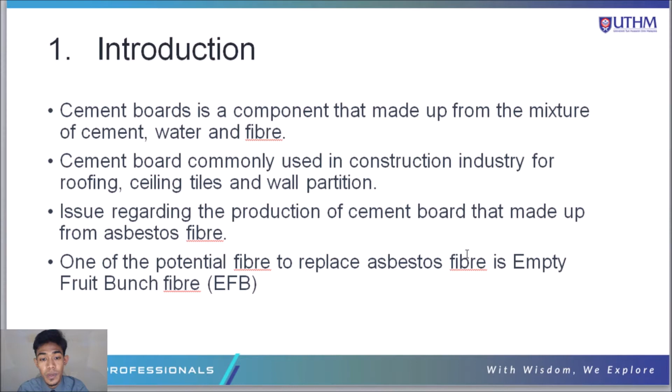This study was undertaken to achieve the following objectives. First, to identify the effect of the vibrocompaction method of EFBCB on stability of thickness and density of the sample. Second, to determine the effect of combination of hot water treatment and vibrocompaction method for EFB in terms of physical and mechanical properties.

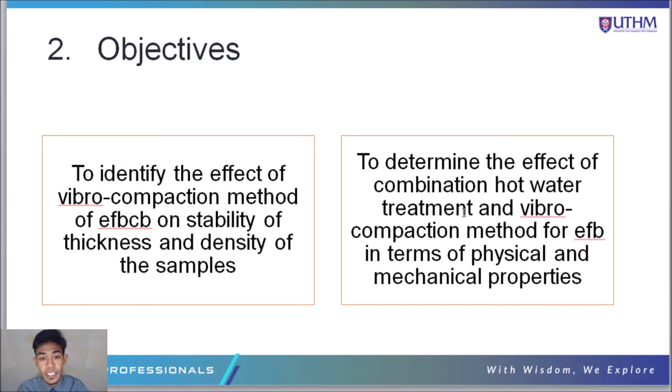There are several issues regarding the production of cement board by conventional method. First, the uneven distribution of cement and fiber within the cement board component affects the density of the cement board. This will affect the final result of mechanical and physical properties of cement board. Therefore, the use of the vibrocompaction method was introduced to evenly distribute the material.

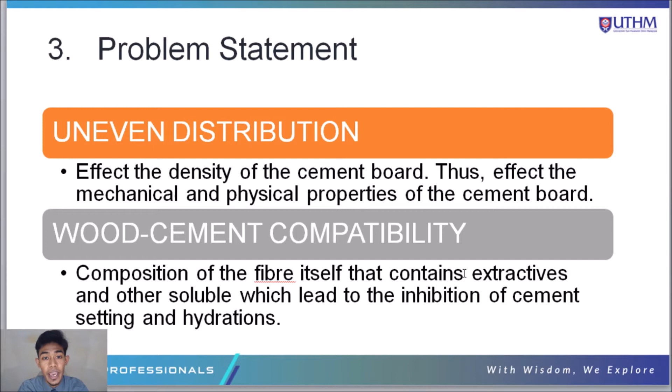Next, the wood cement compatibility. The wood cement compatibility is related to the composition of the fiber itself, which contains extractives and other solubles that lead to the inhibition of cement setting and hydration. Thus, hot water treatment of fiber was introduced to remove the extractives and enhance the wood cement compatibility.

Here is the scope of study. First, use of empty fruit bunch EFB as reinforcement for cement boards. Second, hot water treatment for EFB fiber based on 50 degrees Celsius, 70 degrees Celsius, and 90 degrees Celsius.

Third, modulus of elasticity, modulus of rupture, internal bonding, thickness swelling, density, and thickness will be tested based on British standard. Fourth, the sample was prepared based on density of 1300 kg per meter cube, cement to fiber ratio of 3 to 1, and water content at 40% of cement weight.

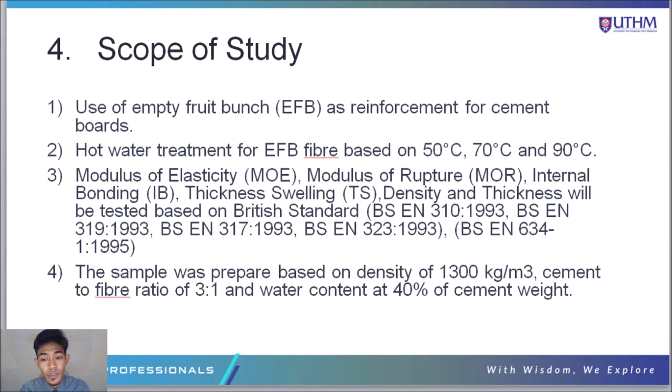Here is the literature review that supported this study. First, by Chiew and Shimada, it is stated that there is a numerous amount of EFB fiber. Next, Abdul et al. 2012, which compared the extractive contents in EFB fiber. Next, Na et al. 2014, which stated that extractives may affect the wood cement compatibility. Next, by Sutigno 2000, stated that the use of hot water can separate the extractives from the fiber.

Next, from Semple and Evans, which proved that the conventional method produces inconsistent mechanical properties of cement boards. Lastly, from Parchen et al. 2016, which introduced the vibrocompaction method.

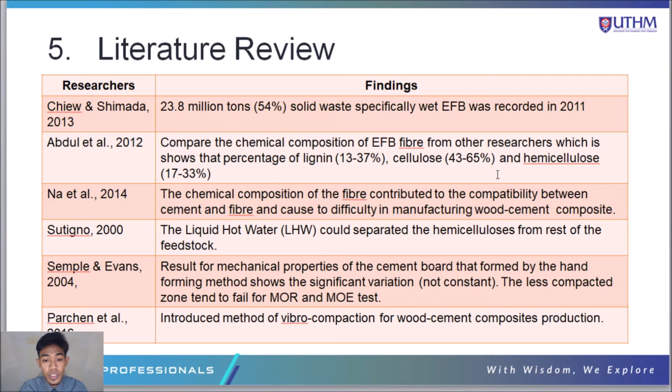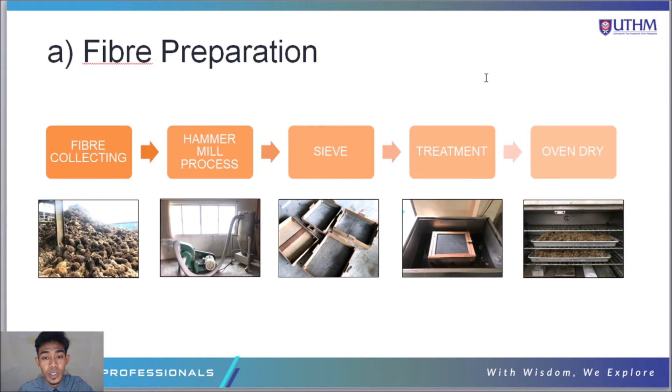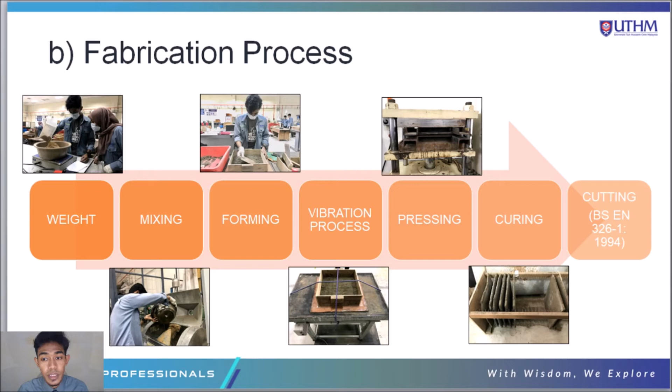The testing for EFB cement board can be separated into two: first, mechanical tests, consisting of modulus of elasticity, modulus of rupture, and internal bonding. For the physical test: thickness swelling, density, and thickness stability.

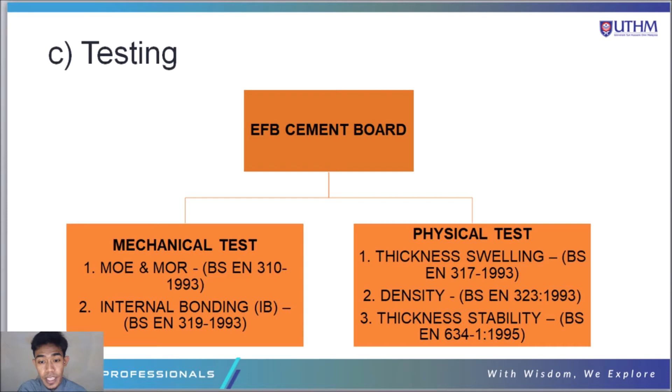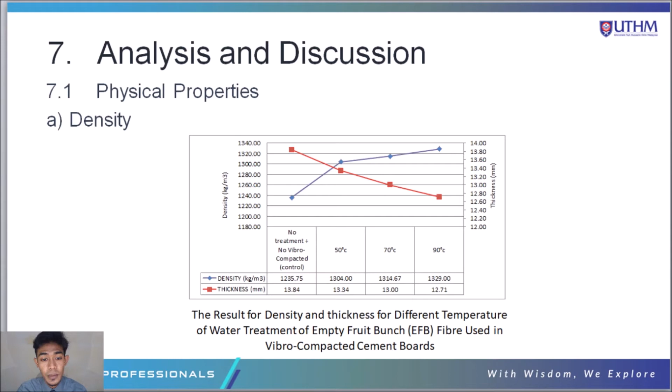Next, analysis and discussion. For the physical properties, starting with density: here is the result for density and thickness for different temperatures of water treatment of empty fruit bunch fiber used in the vibrocompacted cement board.

From the result obtained, the vibrocompacted cement board with 90 degrees Celsius EFB fiber water treatment produces the highest density of cement board, with 1329.00 kg per meter cube. It can be stated that the average thickness of cement board decreased with the increase of the EFB fiber treatment temperature. Thus, density of cement board increased with the decrease of thickness.

For the result, the vibrocompacted cement board with 50 degrees Celsius, 70 degrees Celsius, and 90 degrees Celsius of EFB fiber water treatment achieved the targeted density of the study, which is 1300 kg per meter cube.

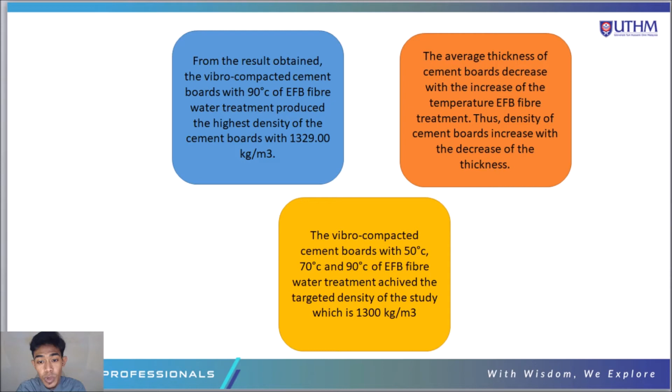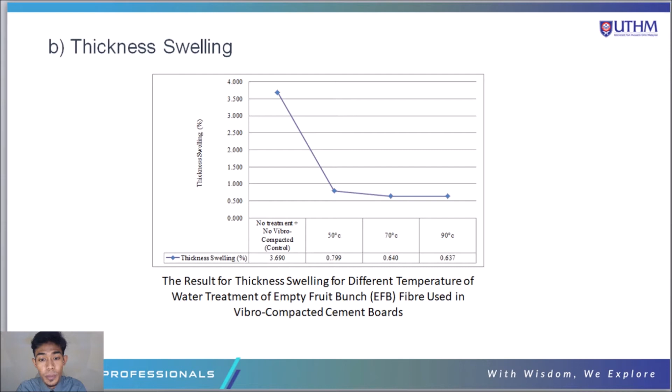Next, thickness swelling. Here is the result for the thickness swelling for different temperatures of water treatment of empty fruit bunch fiber used in vibrocompacted cement board. From the result obtained, cement board that did not undergo vibration and hot water treatment for fiber processing during fabrication produced the cement board with higher thickness swelling at 3.69%. It can be stated that the presence of voids due to the uneven distribution of fiber and cement encouraged water absorption that influenced the thickness swelling. The higher the water absorption, the higher the percentage of thickness swelling.

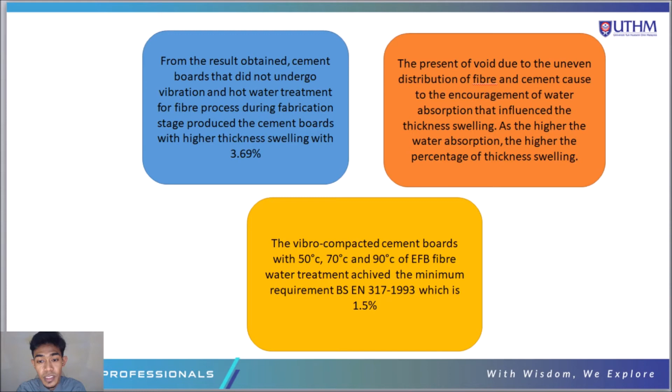From the result, the vibrocompacted cement board with 50 degrees Celsius, 70 degrees Celsius, and 90 degrees Celsius of EFB fiber water treatment achieved the minimum requirement of BS EN 317-1993, which is 1.5%.

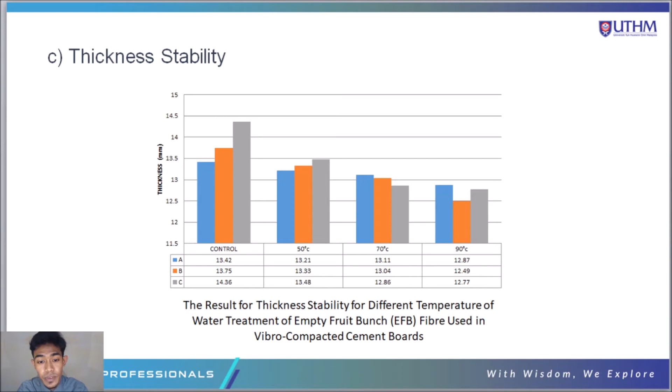Next, for the thickness stability. Here is the result for the thickness stability for different temperatures of water treatment of empty fruit bunch fiber used in vibrocompacted cement board. Based on the result, the cement board that did not undergo fiber treatment and vibrocompaction produced inconsistent thickness of cement board with the biggest difference in reading of thickness, which is 13.42 mm, 13.75 mm, and 14.36 mm. It can be stated that the presence of extractives in the fiber causes incompatibility of wood cement, thus affecting the final thickness of the cement board.

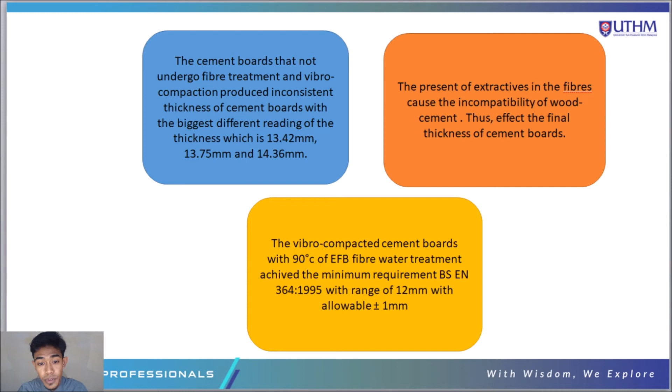From the test, the vibrocompacted cement board with 90 degrees Celsius of EFB fiber water treatment achieves the minimum requirement of BS EN 364:1995, with a range of 12 mm with allowable plus minus 1 mm.

Next, for the mechanical properties. For the modulus of elasticity, here is the result for modulus of elasticity for different temperatures of water treatment of empty fruit bunch EFB fiber used in the vibrocompacted cement board.

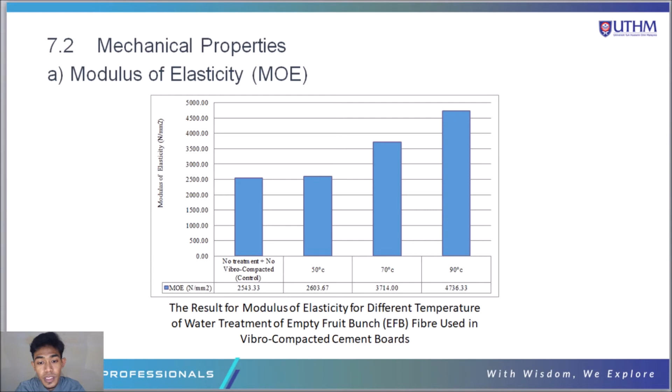From the result obtained, the vibrocompacted cement board with 90 degrees Celsius of EFB fiber water treatment produced the highest modulus of elasticity of cement board, which is 4736.33 Newton per millimeter square. By the pattern shown from the result, as the water temperature increased, the extractives in the fiber could be removed effectively. This condition clearly increased the compatibility between cement and fiber, thus creating stronger bonding between the fiber and cement that led to better modulus of elasticity.

From the test, the vibrocompacted cement board with 90 degrees Celsius of EFB fiber water treatment was classified in class 1, which is 4500 Newton per millimeter square, based on BS EN 310-1993.

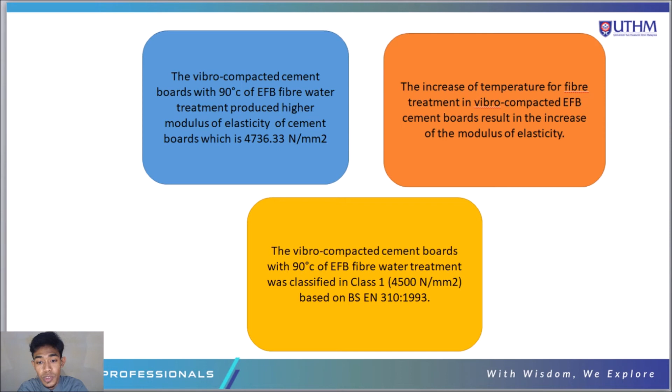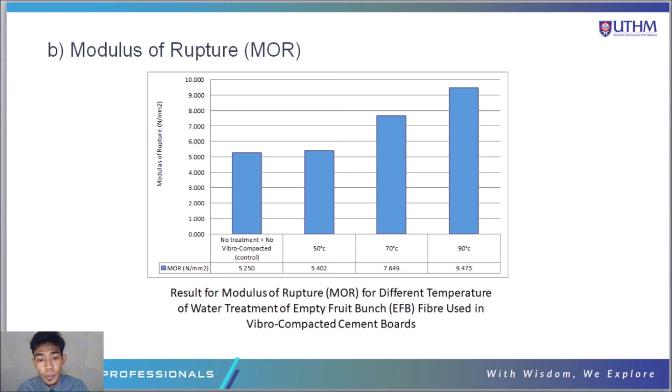Next, modulus of rupture. Here is the result for modulus of rupture for different temperatures of water treatment of empty fruit bunch fiber used in the vibrocompacted cement board. Based on the result, the vibrocompacted cement board with 90 degrees Celsius of EFB fiber water treatment produced higher modulus of rupture of cement board, which is 9.47 Newton per millimeter square.

It can be stated that as the temperature of EFB fiber water treatment for the vibrocompacted cement board increases, the modulus of rupture of the cement board also increases. This is strongly supported by the research conducted by Sutikno 2000, which stated that the modulus of rupture strength of cement board was improved by hot water treatment.

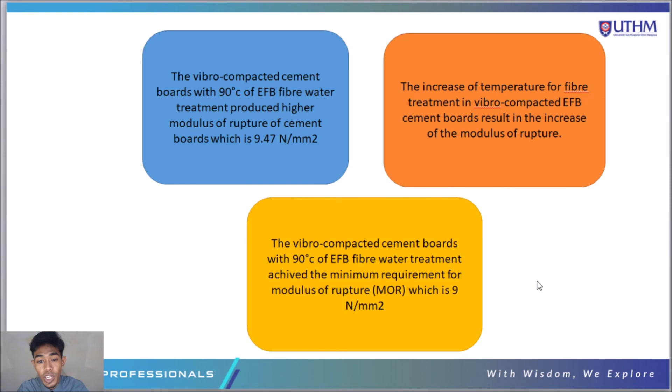For the test, the vibrocompacted cement board with 90 degrees Celsius of EFB fiber water treatment achieved the minimum requirement for modulus of rupture, which is 9 Newton per millimeter square.

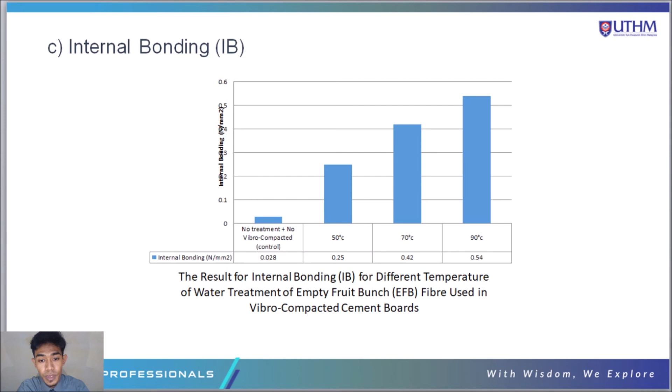Lastly, for the internal bonding. Here is the result for the internal bonding for different temperatures of water treatment of empty fruit bunch fiber used in the vibrocompacted cement board. From the result obtained, the vibrocompacted cement board with 90 degrees Celsius of EFB fiber water treatment produced higher internal bonding with 0.54 Newton per millimeter square.

It can be stated that extractives removed from the fiber by hot water treatment enhance the wood cement compatibility. Thus, as the temperature for the fiber treatment increases, the amount of extractives removed also increases, enhancing the internal bonding of the cement board.

From the test, the vibrocompacted cement board with 90 degrees Celsius of EFB fiber water treatment achieved the minimum requirement for internal bonding stated in BS EN 319-1993, which is 0.5 Newton per millimeter square.

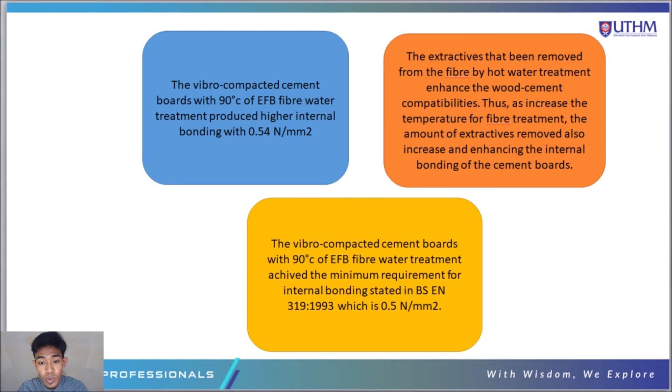It can be concluded that the effect of the vibrocompaction method in fabrication of cement board produced uniform density of cement board due to the even distribution of fiber and cement within the component. Next, the wood cement compatibility was enhanced by the hot water treatment, thus producing cement board with good bonding of fiber and cement resulting in better physical properties.

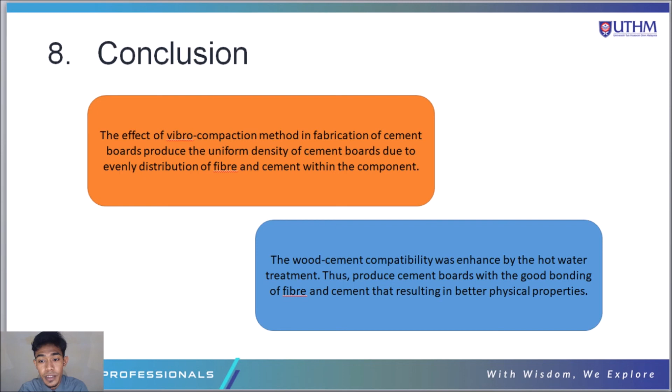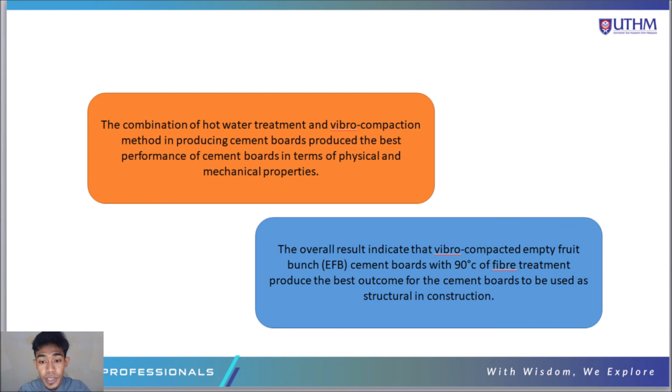Next, the combination of hot water treatment and vibrocompaction method in producing cement boards produced the best performance of cement board in terms of physical and mechanical properties. So, the overall result indicates that vibrocompacted empty fruit bunch fiber cement board with 90 degrees Celsius of fiber treatment produces the best outcome for the cement board to be used as structural material in construction.

Here are some of the recommendations that can be used to improve the production of the cement board. First, place and store the oven-dried fiber in a wet place to maintain the properties of the fiber.

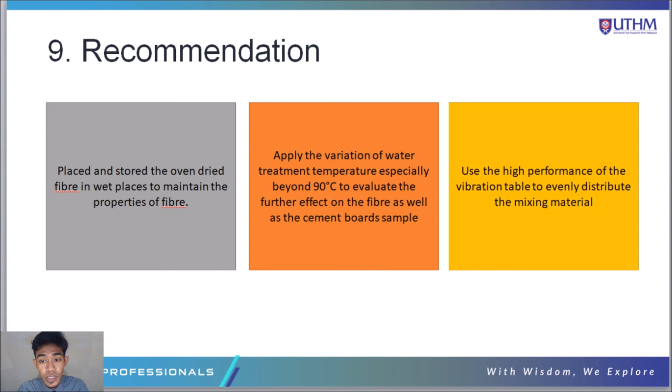Next, apply variations of water treatment temperature, especially beyond 90 degrees Celsius, to evaluate the further effect on the fiber as well as the cement board samples. Lastly, use a high performance vibration table to evenly distribute the mixing material.